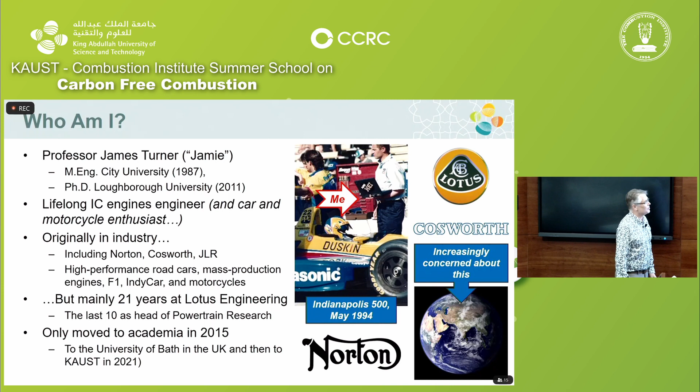Okay, so in this lecture, we're going to talk about some means of fueling energy converters. So this is a little buzzword we've come up with in the industry to avoid the word engine, right? So it does include fuel cells, converting one form of energy into another. So some means of fueling these things with zero CO2 emissions from the tailpipe. I'm not going to talk about carbon cycle, carbon capture, or tailpipe CO2 as such, but this is a way of avoiding emissions of CO2 at the point of use.

I'm going to widen the definition of fuel to include nuclear energy and hydrogen. Right, so there's a bit of discussion about whether hydrogen and ammonia really are fuels because you have to synthesize them. What does fuel mean? But we're just going to use that phrase, okay.

Nuclear energy obviously doesn't use combustion to get heat, and hydrogen is obviously considered more as an energy carrier because there are no hydrogen mines we can go and dig it out of. Everybody says it's the most abundant element in the universe, and that's very true, but it isn't in its free state for us. I mean, it's out there in the cosmos, but we haven't got any hydrogen mines. I'm going to include some talk about fuel cells as well as combustion engines.

Fuel cells, and I know there's a lecture later on, but they're electrochemical devices, so they don't combust fuel, but they do create significant amounts of heat, and that's very interesting to me. The fact that they don't combust fuel and that they create large amounts of heat is a bit of a problem for some people because they think they're really, really efficient, so they won't produce a lot of heat, but they do. But I'll discuss a bit more about that later on.

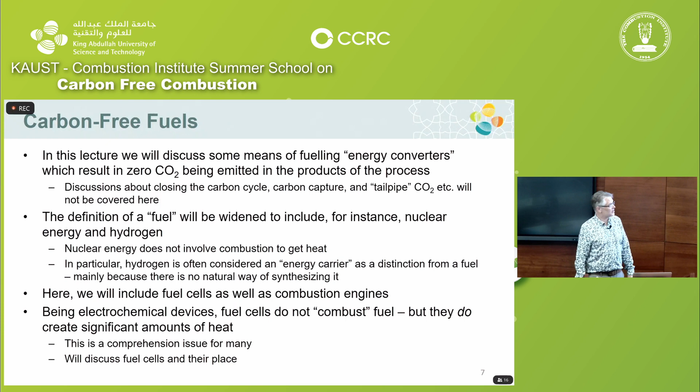So why should we even bother with fuels? You know, Elon Musk is out there saying, no, just electrify everything. You don't need fuels anymore. In fact, he's even referred to fuel cells as fool cells. So, you know, why should we bother with fuel? Well, this is a slide taken from one of the engine consultancies a few years ago, but it's indicative of what everybody says.

Basically, what we're saying is that of 100% electricity put in, you are better off putting it in a battery electric vehicle over this side here, right? You lose less energy, okay? So from an efficiency point of view, yes, you are better off putting it in a battery electric vehicle, but that sort of dodges a lot of the issues, really, because battery electric vehicles are extremely expensive, and we have no real infrastructure to support their rapid recharging, and they bring less utility because the range is less than for a conventional vehicle, if you like.

And what we've got at the bottom of this slide here is the idea of power to X, power to fuels, if you like, electrofuels as we call them. So hydrogen is a simple electrofuel. You use renewable electricity to make hydrogen, and you have green hydrogen, and I'm going to talk about the colors of hydrogen in a minute. But basically, if you convert the hydrogen into something a bit more practical using CO2, your efficiency chain is pretty awful. So a scientist would look at that and say, electrify everything, right? And that's the problem. You can't argue with that.

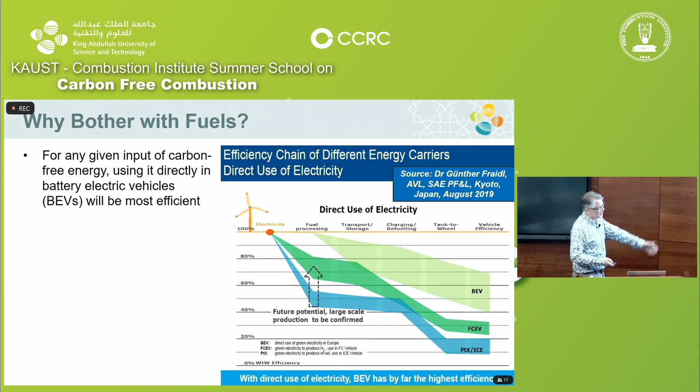Right, so put it in a battery electric vehicle, it is much better, but as I just said, there are wider implications. What about the ease and the simplicity of the change we have to undertake in less than a decade in Europe? The cost of transportation for many people is a very, very important thing in their life. There are unintended consequences as well, like human rights in the Congo, and just the general mess of the planet we're going to make, stripping it of all these elements that we need to be able to do this. Fuels can store renewable energy for a very long period of time. Batteries can't. And so this is another thing. The ability to buffer energy in the fuel system is quite an important thing. Okay.

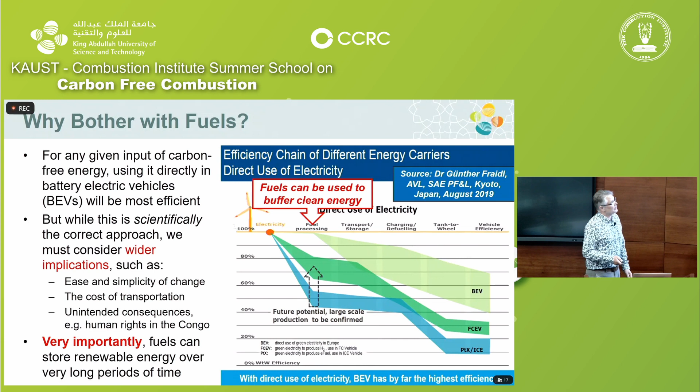Right, so what we're going to talk about. We're going to talk about fuels not containing carbon in this thing. So nuclear, I mentioned hydrogen, ammonia, and I'm going to talk about hydrazine, one slide. And some of the others that have been investigated in the past, boranes. So people have looked at using boranes as fuels. They're quite interesting. The slang phrase is zip fuels. They've actually got a higher heating value than most hydrocarbons. But essentially, I'm going to talk about the middle three up there. Some of these have some pretty awkward disadvantages versus hydrocarbons.

The internal combustion engine operating on liquid fuels has been the silver bullet for transport. You will hear this phrase, there is no silver bullet. Well, that's because we've already got one, right? You can't just replace that with only one thing. So we have a silver bullet. Nothing comes close. You know, it's set the bar for convenience and usability. And as a result of all of that, we've built over 2 billion cars to date. And you do a quick sum, that means there's a seat in one of those cars that has been made. I know they don't all exist now, but if you could get hold of them, you could put everybody alive on the planet in one of those cars, right? That is pretty amazing. That's an absolute triumph of mechanical engineering.

Have we got any mechanical engineers in the room? Ah, fantastic. You should feel proud of yourself now. I know. Automotive engineering, wow, that is the case study, really. Because they're very complex things, despite the fact that everybody thinks they're old technology and we should sweep them away in terms of engines.

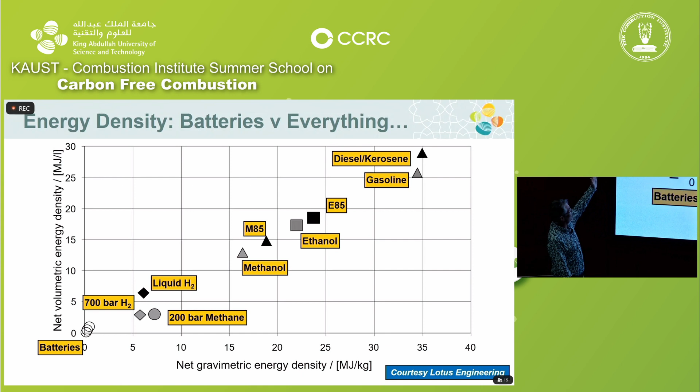so right, this is the basic problem, right? Energy density, batteries versus everything. Okay, so what we've got here is the net gravimetric energy density and the net volumetric energy density of a full fuel system. Right, so along the bottom, this is the amount of megajoules you can store per kilogram of full fuel system. And this is the amount of megajoules you can store per litre of full fuel system. And you see there's a nice sort of straight line through all of this, but there's some quite interesting things in it.

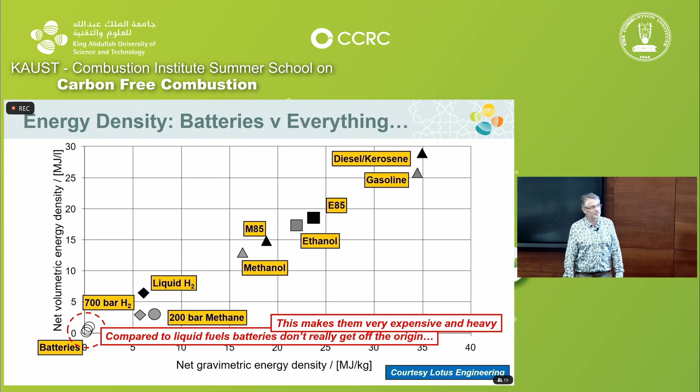First, batteries hardly get off the origin, right? This is a very good lithium-ion battery, right? You hardly get off the origin, and that is a problem because it makes them expensive and heavy. You need lots of it, right? Compared to batteries, hydrogen is usefully better. And there's a bit of a rider on that. That's at the automotive scale. There are some situations where it becomes really good, and I'll briefly mention that later on.

Surface transport could happily live in that space. The alcohols, basically. M85 means 85% methanol, 15% gasoline. E85 is the same for ethanol, and that is a practical fuel. And the reason it's practical is because they're liquids, right? Up there, aviation, you really need to be in the top right-hand corner of that chart, because for aircraft, the takeoff weight and all the rest of it is really, really important. So we will talk about aviation, but basically, to solve the problem with aviation, you have to address the fuel, right?

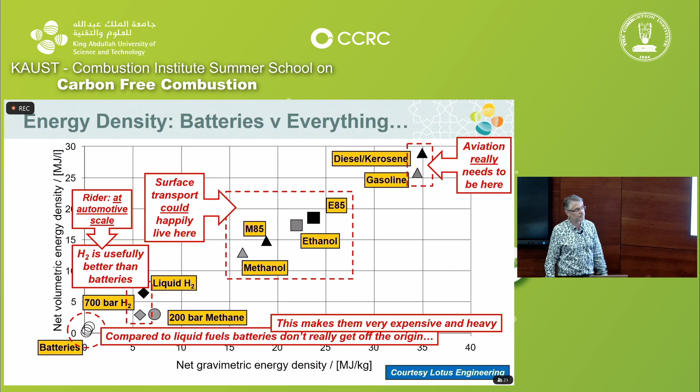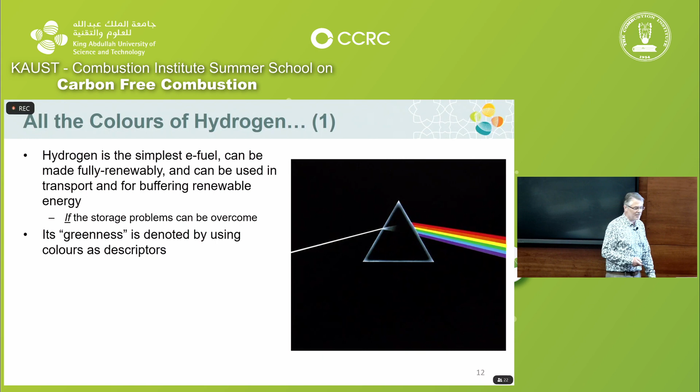Right, so hydrogen is the simplest e-fuel. It's the easiest one we can make fully renewably, and we can use it in transport and for buffering renewable energy because it's a chemical store, if we can overcome the storage problems, and we're certainly going to come back to that. The greenness is denoted by using colors as descriptors. So most hydrogen currently supplied has a significant fossil CO2 footprint. You generally obtain it by steam reforming of methane, with the CO2 just released into the atmosphere. That is termed grey hydrogen, black hydrogen. If you get it from coal, sometimes it's termed brown hydrogen. There's all different colors. But essentially, it's that end of the scale.

Blue hydrogen we obtain from natural gas, but we sequester the CO2. You can get it from oil and coal in the same way. Both have a slightly higher carbon footprint. We often consider using the CO2 for enhanced oil recovery. So you pump the CO2 back into wells to push more oil out. And that's great because on a net basis, you actually put more carbon back in the well than the oil that you take out, I believe. So that's okay. But these forms of hydrogen are not particularly pure, and that matters for fuel cells, and we'll come back later on.

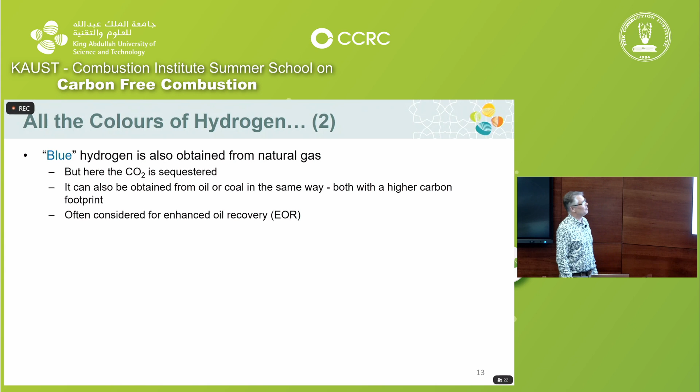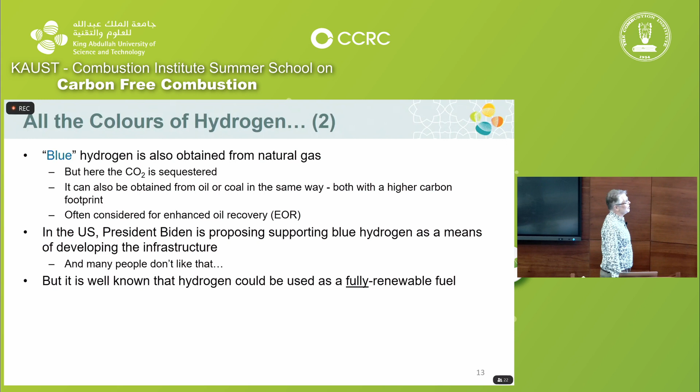In the US, Biden is promoting blue hydrogen as a means of developing the infrastructure, and lots of people don't like that on the environmental side, but nevertheless, it's a way of promoting hydrogen carrying infrastructure using a cheaper form of hydrogen than green hydrogen. But we know we can make hydrogen fully renewable, and that's green hydrogen. You use electrolysis of water to get that, and it's termed green when you use fully renewable electricity. Yeah, the amount of energy required, though, is very, very high for electrolysis. Electrolyzers are pretty efficient. They're 77 to 83% efficient, but that doesn't stop the fact that you have to have a lot of energy to break the hydrogen-oxygen bonds.

Okay, so hydrogen to mitigate CO2 release. We can also obtain it from oil and coal, leaving a solid black carbon residue. That's a carbon-free hydrogen. Whether it's really green, I don't know. But the fact is that you get a solid carbon residue then. So as long as you don't convert that into CO2, that's pretty good. And of course, you can use carbon for other things, tires and carbon fiber and things like that. There's a value to it as an element.

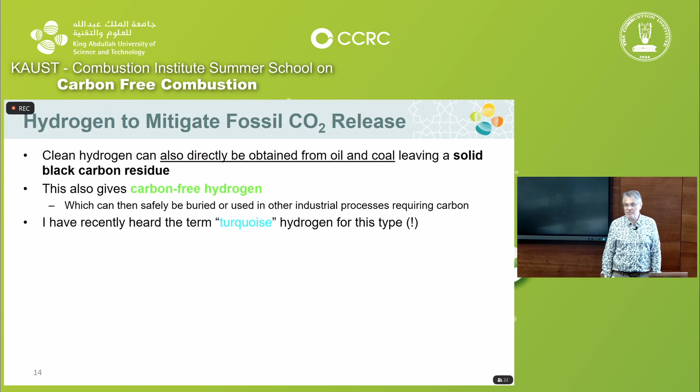I've recently heard the term turquoise for that sort of hydrogen. Who knows? There are so many different terms. But you have to make sure that you don't oxidize it. KAUST in the Kingdom and the University of Oxford have been looking at different processes to dehydrogenate oil using catalysts. So I won't go into that in any more detail, but it's quite interesting.

Right, just to say, in case anybody hasn't explained to you where our logo comes from, it's because we're trying to move from grey to green through all this spectrum here. So that's where the logo comes from when you see it again, obviously a stylized C.

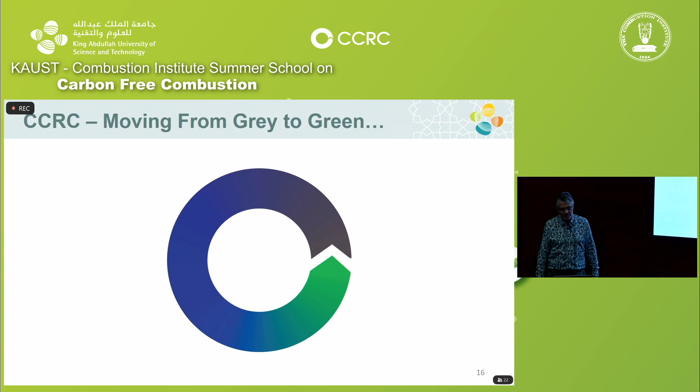Right, one of the major problems with hydrogen: storing it. You can store a useful amount of energy on a vehicle with hydrogen, and the recharging times are much lower than batteries. Actually, in terms of energy transfer, what we're aiming for is about 2 to 3 megawatts. We're aiming for higher than that for heavy duty. Just for reference, when you refuel your car with a pistol grip, you've got about 8 megawatts of energy going through your hand when you do that, right?

Think about that for a minute. If you've got an electric vehicle and you had an 8 megawatt cable, I'm not sure I'd want to hold that. But we're all used to holding the pistol grip. Just think about the power that is going through your hand. The most powerful person in the village is the one refueling their car, basically. So we can get up to a useful refueling rate with hydrogen, but it's the least dense element. And that's a considerable problem for storage.

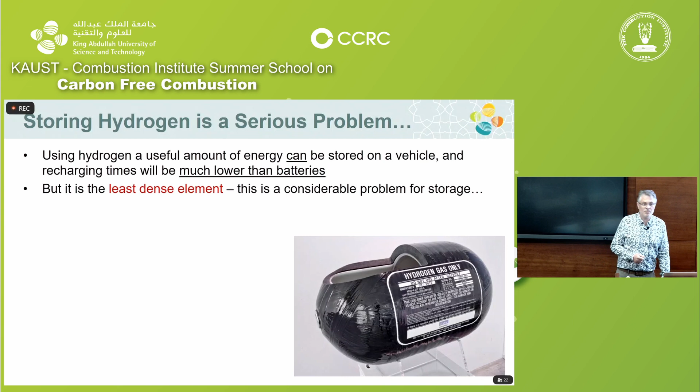There are 2 main proposals for storing it. Pressurization is the first one, either to 350 bar for heavy duty or 700 bar for light duty. So that's compressed gas storage, CHG, compressed hydrogen gas, or liquefaction. So this is an early high pressure storage tank. You can see that we've got it wrapped with carbon fiber all over the place. There's a plastic interior because hydrogen will go through metals. And as it goes through the metal, it embrittles it on the way, which is not good. So there's a plastic inner liner to keep the hydrogen in, and then you have to wrap it lots because you've got a massive pressure inside when it's full.

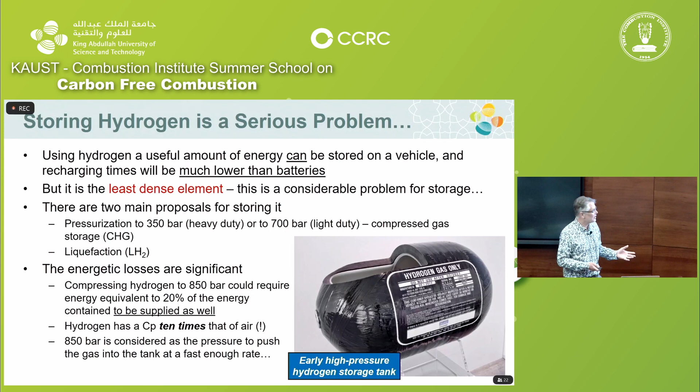Energetic losses in making it storable are significant. So when we talk about 700 bar, everybody thinks, oh, I just have to pressurize it to 700 bar. But of course, it's a gas. It only flows when there's a pressure difference. So you have to go up to a higher pressure somewhere in the system. And generally, people talk about 850 bar, just to get it to squirt into the tank and pressurize the tank to 700 bar. That could require, depending on the size of the plant, up to 20% of the energy supplied, so 20% of the lower heating value of hydrogen, which is huge because hydrogen has a very high lower heating value. Also, hydrogen has a Cp 10 times that of air, so compressing it requires a lot of power. So that's where that comes from. 850 bar is considered the upper system pressure to get a fast enough flow rate.

BMW did a lot of work in the area of liquid hydrogen storage. This was about 30 years ago. They were at the forefront of putting hydrogen into engines. They believed this was the future. Unfortunately, they seem to have picked the wrong storage choice given what we now know.

The problem with liquid hydrogen storage is that you need to keep it at 20 Kelvin, right? You're out there in the real world, maybe in Saudi Arabia, where it's very hot, and you need to keep it at 20 Kelvin. The slightest amount of heat going in through the system causes it to boil. And then you just have to vent it. Quite famously, they reckon that if you had one of the hydrogen cars and you left it in a car park for 2 to 3 weeks, if it was full when you started, you'd come back and it would be empty. It would have all boiled off. And clearly any boil-off is a disaster because you have to put so much energy into liquefying it in the first place.

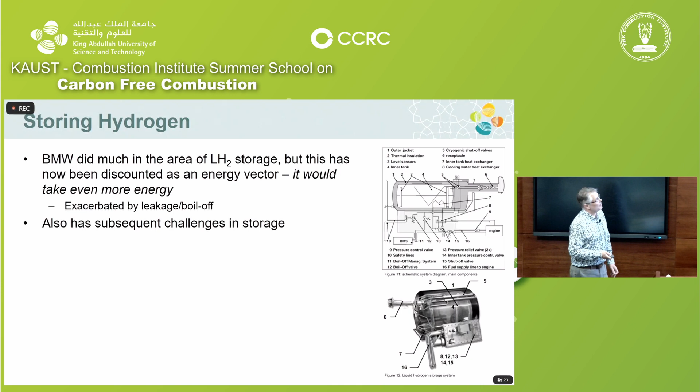You've obtained it, then you liquefy it, and then it just boils off. Right? So this is an issue. You don't get the boil off with pressurized hydrogen. So that is why really we're thinking about pressurized hydrogen for light duty. There are some serious challenges in storage because it's 20 Kelvin.

People are also looking at a mixture of cryo and compression to get the energy transfer rates up, about 67 kilowatt hours per minute, 4 megawatt rate with this. So it's quite a high rate of energy transfer. And as I say, it's the least dense of all elements, and we don't have a significant molecular hydrogen supply system. So that's a big problem.

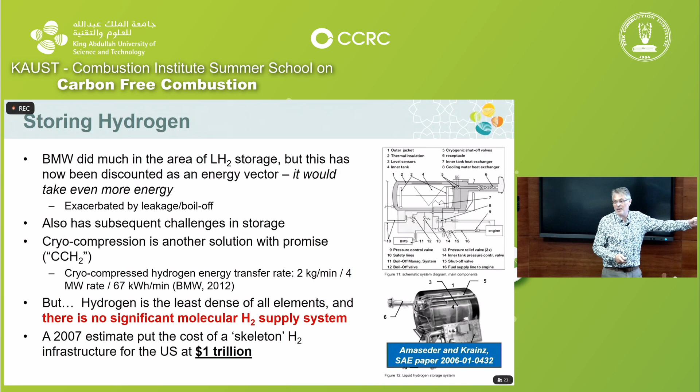In 2007, there was an estimate in the States that a skeleton hydrogen system, so one that just basically went down most of the freeways, would have cost then at least $1 trillion. Now, I know nowadays everybody chucks around figures of $1 trillion, you know, a trillion here, a trillion there. Pretty soon you're talking real money, right? But that was a big amount of money 15 years ago.

Something on what BMW did and have done, they've looked at liquid hydrogen storage, as I said, in a great deal, and they did a paper with a partner, Magna Steyr, who are a tier one, a supplier directly to the auto industry. They did actually go through all the process of developing a tank that could be productionized, right? It took them a lot of money to do that, and they had to subject it to a bunch of different tests. So this is a bonfire test.

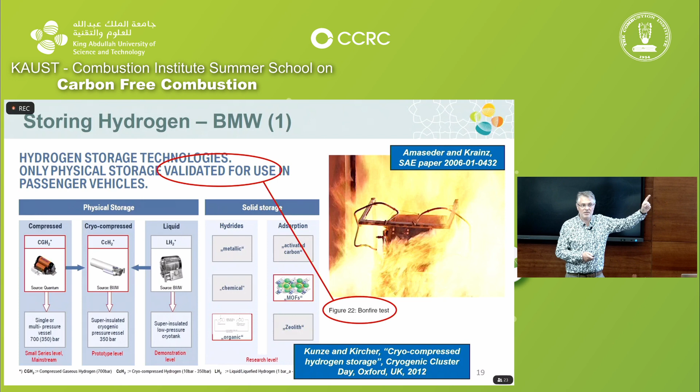So everybody gets concerned about what happens if you rupture a hydrogen tank or if there's a fire or whatever there is, and it passed this bonfire test. So inside this tank, it's full of liquid hydrogen. Managed to pass it. I don't know how long the test was, but pretty impressive seeing flames around like that around a hydrogen tank. It didn't rupture or explode.

So this idea of cryocompressed hydrogen is quite interesting. So one of the reasons for looking at liquid hydrogen is that the density of liquid hydrogen is 71 kilograms per cubic meter, right? I know that doesn't mean much to anybody, but basically that is the density of styrofoam. So in its liquid form, it's got the same density as styrofoam. So it's not very dense. But if you compress it to 300 bar in its liquid form, it'll go all the way up to 80 kilograms per cubic meter.

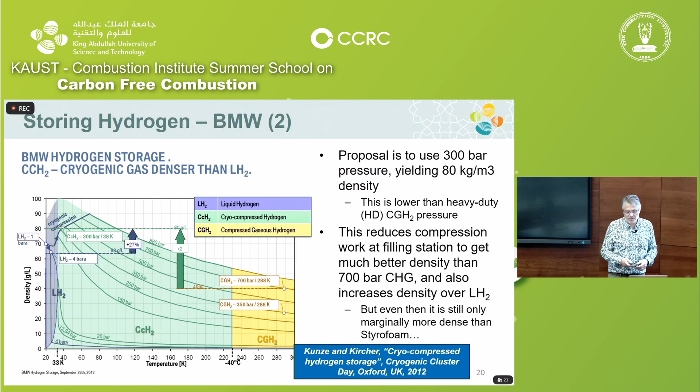That's lower than the heavy duty pressure, right? So this combination is being looked at. It reduces compression work at the filling station. So that's one of the reasons why they were looking at it. And this idea of cryocompressed is still out there as a possible means of improving the energy storage rate.

So hydrogen in engines. We need a portfolio approach to this. At the moment, the danger is the politicians have decided on the winner, and that is the battery. And everybody better get behind that, right? Because that's what the scientists say. That's the way, efficiency. And the engineers are going, hold on a minute. That may not be good. You create this monoculture in the future. What happens if there's a massive interruption in lithium supply or something like that? We need a portfolio of technologies to decarbonize the sector.

The heavy-duty sector is the one that's most likely to adopt hydrogen as an energy carrier rather than batteries. And this all varies around the world, and I apologize for a bit of a European-centric view here, but Europe is forcing the issue more than others. And a lot of that is about recharge time, because a heavy-duty vehicle only makes money when it's moving. When it's not moving, it's not making any money because you're being paid to move things. So in that sense, we'll come back to this. Aircraft are heavy-duty vehicles. Pay for something to be moved.

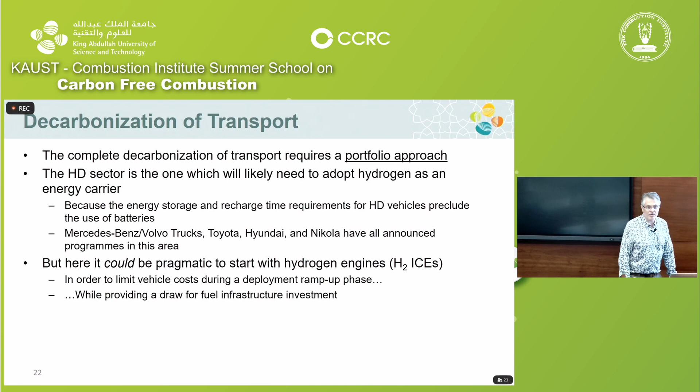So all of these truck manufacturers, some of them more established than others, have had programs looking at hydrogen storage for heavy-duty and usage. It could be very pragmatic to start with hydrogen engines, H2ICEs, in order to limit the vehicle costs during the deployment ramp-up phase. That's because fuel cells, PEM fuel cells, are really expensive. I'll come back to PEM, what that means in a minute.

And the point here is that if you put the engines out there, it'll draw the infrastructure forwards. We don't need the very, very high purity for fuel cells, but we will have a demand for hydrogen, and that will put more people making infrastructure decisions.

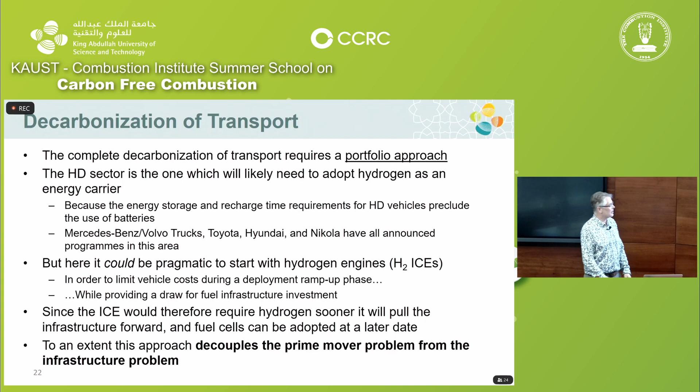Yeah, that's what I just said. So once you've got the infrastructure in place, you can then work on purifying the hydrogen that's in it. Right? And then the fuel cells can come along afterwards. So it hasn't got to be an absolute binary step that you've got to make. So you decouple the prime mover problem, as we call it, from the infrastructure problem.

So some of the characteristics of hydrogen, it's got some useful and some challenging attributes for use as a fuel. The benefits include it has very high lower heating and higher heating values, the highest of any fuels, 120 megajoules per kilogram as a lower heating value. Very wide ignition limits, right? So between 4 and 75% by volume in air. 4% in air is lambda 10.5. You can still just about burn it when you have 10.5 times more oxygen than you actually need for complete combustion.

It's a very fast flame speed as well. That allows you to dilute the charge a lot, get higher efficiency. But the challenges include it has a very low ignition energy. Heard this lovely phrase before: hydrogen is an angry gas. It just wants to ignite. Right? In any situation, if there's oxygen around, it wants to go bang. And this is the problem. That's a major safety problem, much, much worse than gasoline or any of the hydrocarbons.

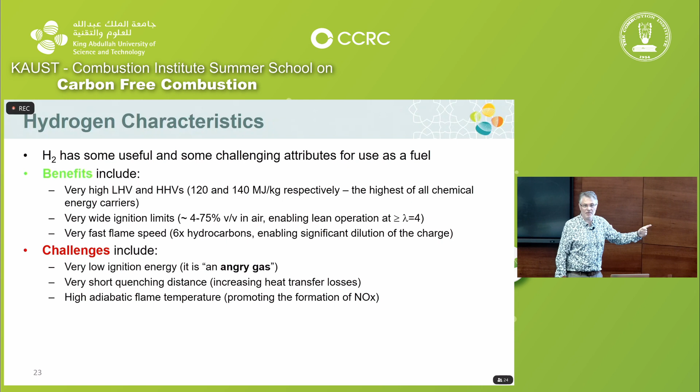Very short quenching distance. So that means that the flame goes out much, much closer to the wall, and that means you get much higher transfer to the surfaces of the wall. And Gio's going to talk about some of that after this talk. Very high adiabatic flame temperature, which promotes the formation of NOx. But fortunately, because we have very, very wide ignition limits, we can control the NOx by running it with a lot of diluent and reducing the temperature that way. So there's still limited understanding of hydrogen auto-ignition behavior. That is improving, but there's a bit of a research opportunity there.

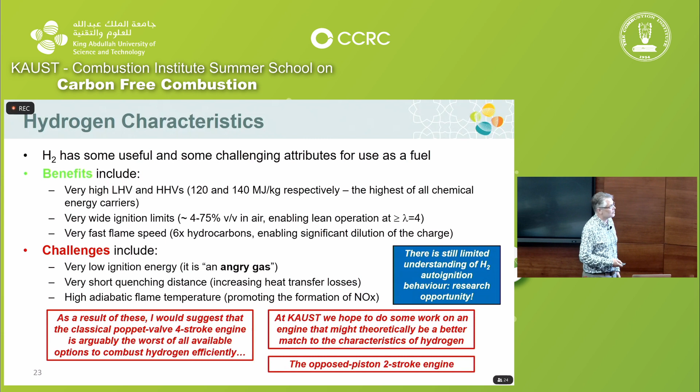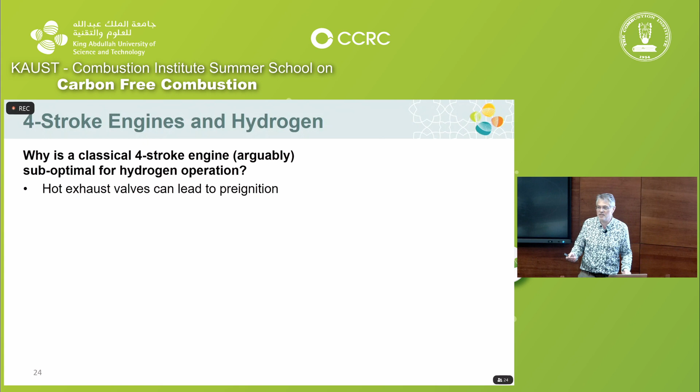Now, I won't go into it in too much detail, but there is quite a bit of evidence to suggest that the classical 4-valve per cylinder poppet valve engine, the 4-stroke engine, which we make in vast numbers, is not very optimal for using hydrogen. That's definitely what Gio's going to talk about. So we're going to do some work on some of these things, 2-stroke engine included amongst those. So why is it arguably suboptimal for hydrogen? Hot exhaust valves, they can cause pre-ignition. Yeah, you don't need much thermal energy to ignite the hydrogen.

Port fuel injection engines, so this is where we put the fuel in before the intake valve, can have problems with backfiring, which limits the injection timing and also provides a limit on how much power you can get out of the engine. Normally with engines, if the catalyst is getting too hot, we will inject some extra liquid fuel and that cools the whole combustion down. Right? So that's called catalyst over temperature protection. You cannot do that with gases because they don't have any latent heat, right? So that's one of the problems with any gas in an engine.

The low density of hydrogen displaces air, right? And significantly reduces the power output. So what we call external mixture preparation, port fuel injection if you like, has a theoretical maximum power of approximately 80% of a gasoline engine. So not the worst thing in the world, but it does reduce the attractiveness, shall we say.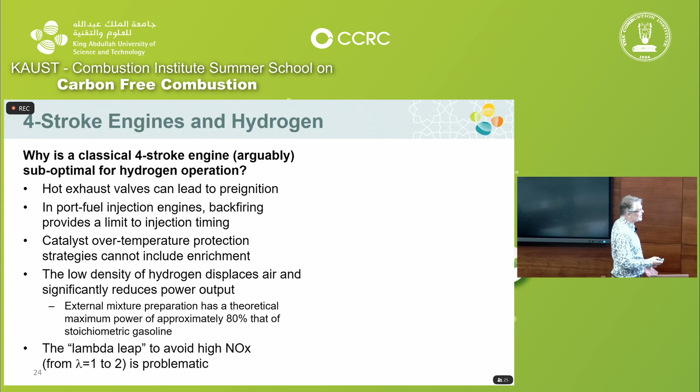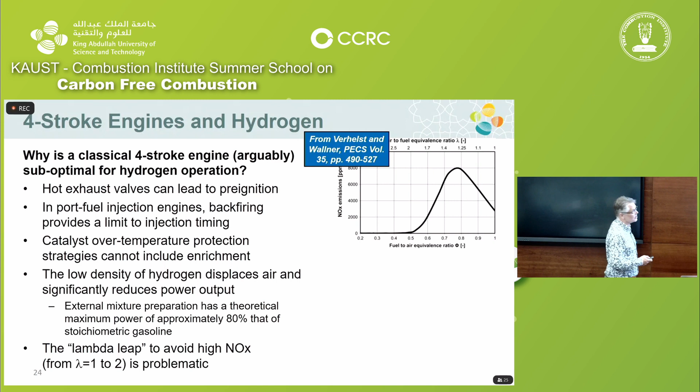Right? So what we're looking at the moment is means of leaping from 2.5 to 1, because when you leap to 1, you can use a simple catalyst. Okay? Anywhere between 1 and 2.5, you can't deal with the NOx that comes out of the engine. At 2.5, there's not really any NOx. So we need to think about strategies to be able to do this. BMW did some early work with this, with their hydrogen engines. So there's some quite interesting strategies that we're going to investigate.

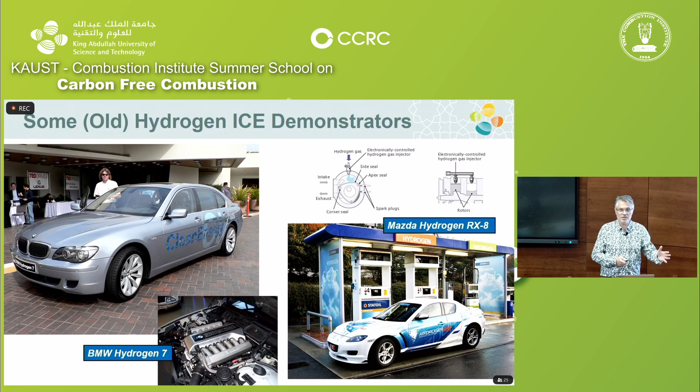So there are some old hydrogen internal combustion engine demonstrators. This is the BMW Hydrogen 7. I think they made about 50 of them. It's a bi-fuel engine, actually. It would run on gasoline or hydrogen. And then Mazda in Japan built a series of rotary engine demonstrators that ran on hydrogen. Gio's going to talk about the rotary engine on hydrogen, but theoretically that is a very good match.

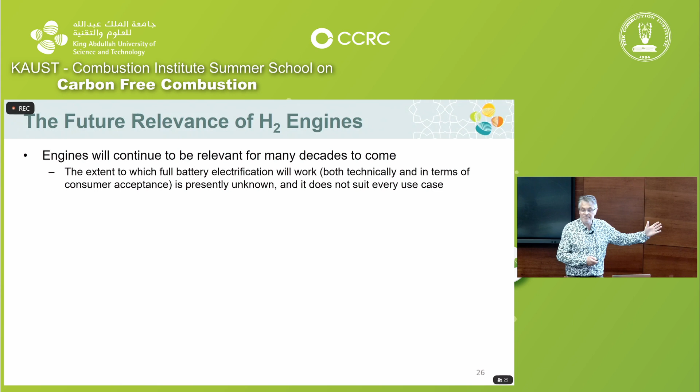Okay, so the future relevance of hydrogen in engines: they're going to continue to be relevant for many decades to come, basically. That's my view, and I think it's the view of a lot of the industry. And that's because the extent to which full electrification is going to work is by no means proven, right? It doesn't suit every use case either.

So technology development is going to slow down as the car manufacturers, the OEMs, sorry, buzz phrase, the OEMs move to electrification. They're potentially the reason why a lot of engine research is done. So technology development will slow down, but there are still many technological routes open to us with engines. It's by no means a fully understood area.

Hydrogen ICEs are going to be necessary for zero CO2 tailpipe emission heavy-duty applications, and they're being developed now. And because it's a well-understood technology, the ICE, you could imagine it being relevant for light-duty applications in some parts. Depends on the infrastructure, obviously. And particularly, this might be important if the battery electric vehicle thing starts to falter, because they're always going to be expensive. But we are dependent on the supply infrastructure.

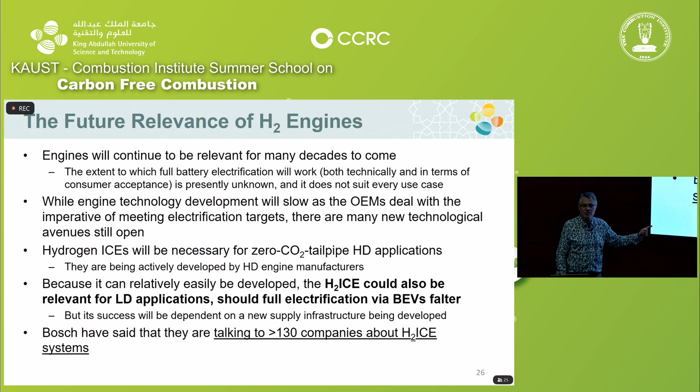Robert Bosch, the supplier of fuel injection equipment worldwide, have said in one of the conferences that we had here, they had been talking to over 130 companies about hydrogen internal combustion engines. I guess most people would think there aren't 130 internal combustion engine companies in the world, but there are more than that. But that is a vast proportion of it. And that, to me, suggests that while the companies all talk about battery electric vehicles, a lot of them are still investigating engines with hydrogen in because they need a backup plan in case the electrification thing doesn't work.

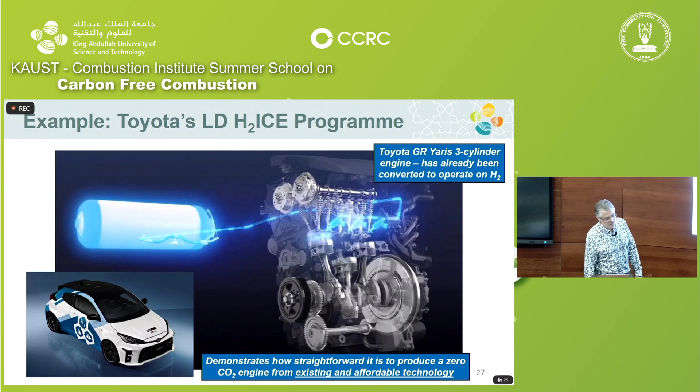So Toyota have got a program, it's quite public. They've hydrogenized, I won't say hydrogenated, we'll say hydrogenized, one of their engines, the Toyota Yaris 3-cylinder, converted to run on hydrogen. But it actually really demonstrates how straightforward it is to produce something which is effectively zero tailpipe CO2 from existing and affordable technology. And this is very recent. This is within the last week, I think.

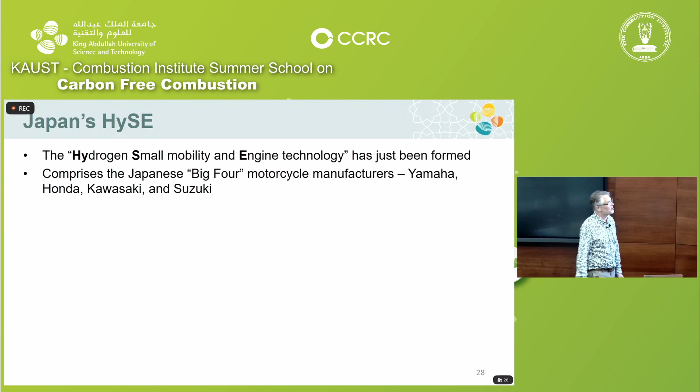So Japan has just formed a publicly funded consortium, the Hydrogen Small Mobility and Engine Technology Consortium. It comprises the Japanese big four motorcycle manufacturers, Yamaha, Honda, Kawasaki, and Suzuki. Quite how they got them all to work together, I don't know, because obviously they are vast conglomerates in their own right, and ordinarily they'd be competitors. They're going to develop hydrogen-powered engines for motorcycles, small marine vessels, construction equipment, and small vehicles in Japan.

And the chairman of HySE is the executive officer of Yamaha's R&D Center, and he said, "We are committed to this endeavor with a sense of mission to preserve the use of internal combustion engines, which epitomize the long-term efforts that our predecessors have invested." So I'm right behind this guy. He's going into this because he wants to keep the engine alive. So get behind that. We look forward to what they manage to throw out in the future.

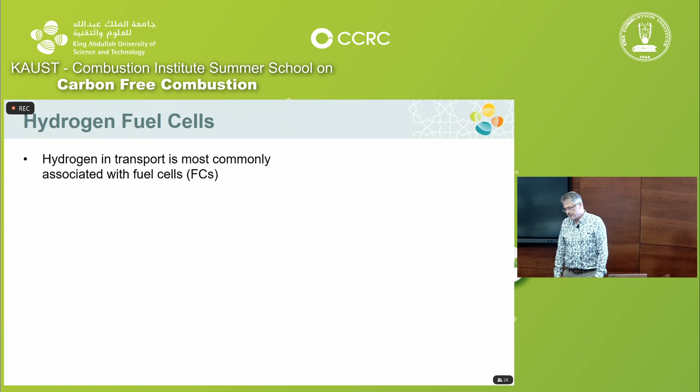Right, hydrogen fuel cells. Hydrogen in transport at the moment is most commonly associated with fuel cells, FCs. They are not a new technology, right? William Grove invented the first one in 1839. GM built the first fuel cell vehicle in 1966. They called this thing the Electrovan. And what you can see here is it was a sort of minivan thing in the States. There's one passenger seat in the back. But you know what? They built it and they ran it nearly 50 years ago.

Fair enough. GM, a fantastic company when it comes to research and development. The products they make, we can move to one side. But in terms of the impact that they've had in the world, particularly in terms of internal combustion engine understanding and development, it is pretty big. Yeah, they used to have lots and lots of money. At this point in their history, people were saying that General Motors had more money than God. So this was a bit of a toy, I guess, but nevertheless, they built and ran the first hydrogen fuel cell powered vehicle then.

Now, I will say this. Right, the fuel cell and the battery significantly predate the internal combustion engine. Everybody wants to work on the latest technology, right? If you want to work on the latest technology, you work on internal combustion engines. Otherwise, you are going into the past, okay? It's as simple as that. The history books tell us this, right? Internal combustion engines are the most modern conversion technology that we have.

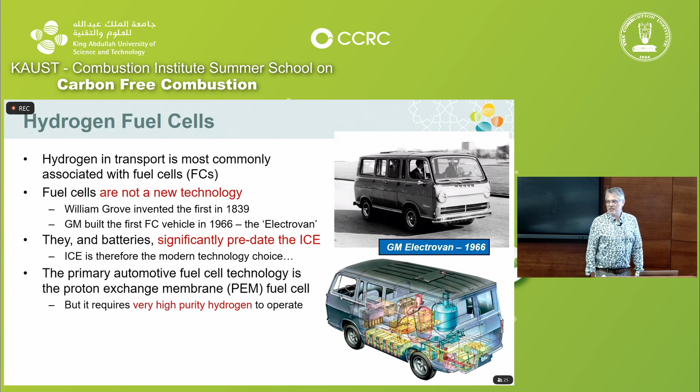So the primary fuel cell technology for automotive use is the proton exchange membrane, or the PEM fuel cell. It's very expensive because it has a lot of catalyst in there. And as a result of all of this, it requires very, very high purity hydrogen. If you put the slightest amount of CO into the hydrogen, it will kill the fuel cell. And the catalyst loading is massive, right? This is a major problem.

We are doing a project at the moment investigating poisoning of fuel cells. But basically, what this means is ordinary blue hydrogen or grey or whatever it is, isn't clean enough by a long way. Put it in an engine, no problem, that won't even notice. But for a fuel cell, way, way off, right? So green hydrogen is really the way that we have to go with fuel cells, because obviously when you electrolyze water, you don't get any carbon out with it. So that's a match. But we require very high purity hydrogen for PEM fuel cells.

PEM fuel cells are also a form of low temperature fuel cell. So they operate at about 80 degrees centigrade. This means that they have to reject the 30 to 40% of heat that they produce at 80 degrees, right? So everybody thinks they are really efficient, and they think that that means that they won't need very big radiators. When you look inside a fuel cell vehicle, the radiators are huge because they only have a small temperature difference to reject the heat over. And that's always a problem for people when they see them first time. Why are the radiators so big? It's because of the problem of heat rejection.

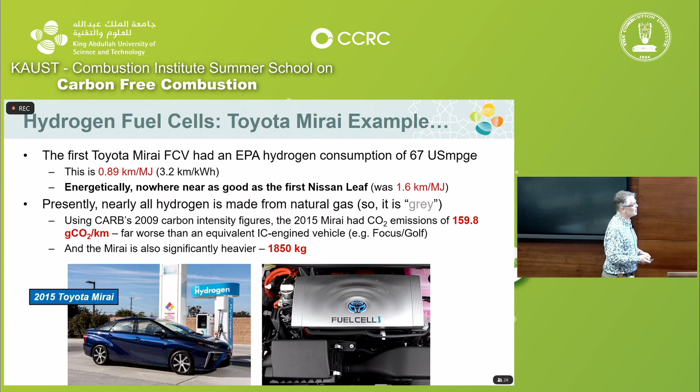So we've got other fuel cell vehicles now. Mirai, latest one, has improved the efficiency. It's now up to about 0.81 kilometers per megajoule. That's worse, isn't it? Oh, well, I'll have to go back through that. The latest EVs are approaching 1.8 kilometers per megajoule. But they're never going to be as efficient as electric vehicles. But that's not the point. It brings you some convenience, right? The rate at which you can refuel them is the important thing.

And of course, with trucks, batteries that carry a lot of energy are very, very heavy and very, very bulky. And trucks have maximum weight limits, or you want the maximum volume size for payload. This is another impact. So this is where fuel cells start to make sense in trucks. Yeah, rapid refueling is a major, major thing.

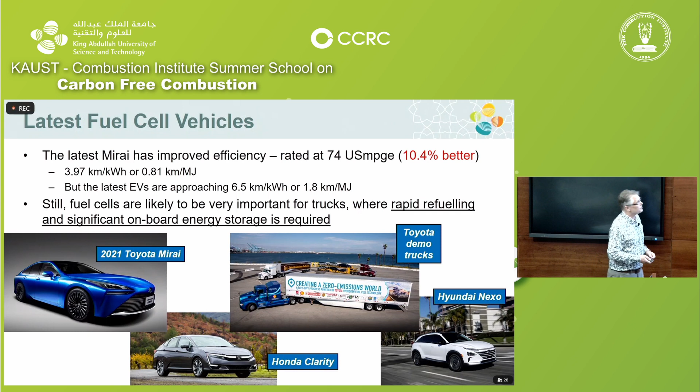So you can make a choice for a truck. Do you put the PEM fuel cell in or an engine? PEM fuel cells are efficient, 63.7% peak efficiency in the first generation Mirai. This is the stack level efficiency. Stack level efficiency is 66%, and the fuel cell system efficiency is 63.7, right?

That's really, really good. But I'll just invite you to look at the fact that really that's about 5 or 10% of full load, right? That's where the maximum efficiency is. If you want to run the thing in a heavy-duty vehicle, you generally run up towards full load, right? And as you run a full fuel cell, its efficiency drops off. Round about full power, Mirai is only 40% efficient, right? That's not particularly good compared to a combustion engine.

So a hydrogen combustion engine should be expected to beat that. There's not anybody that works in the industry that doesn't expect us to beat that with a hydrogen combustion engine. So you could operate the fuel cell at a lower load to get the efficiency up, but then you've got to have a much, much bigger fuel cell. And they're really expensive, right? So you're now into a balancing act of the sizing of the fuel cell.

And of course, engines put out shaft work, so the transmission is more efficient in an engine-based power production system. So we should be able to exceed this in a vehicle. That's why there's all this work going on hydrogen combustion engines.

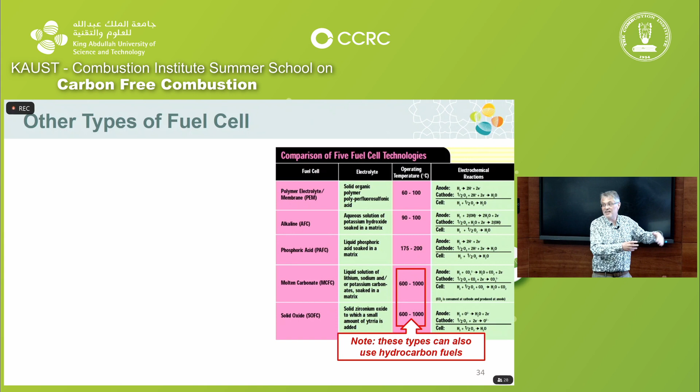So the beauty of it is the majority of the energy conversion is not subject to Carnot efficiency, which is the problem with combustion engines. The majority is electrochemical, right? And then you put the waste heat recovery on, that is subject to Carnot efficiency, but basically anything you can get out of that is a win. It improves your efficiency. I love that. We're back in the ring as mechanical engineers, as I say.

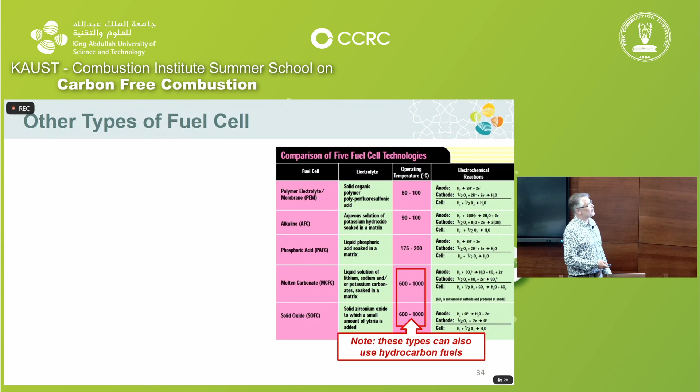Yeah, Mirai stack efficiency, 66%, that's what they quoted, so 29, 30% of the energy is heat. Compounding with a turbine, up to 80%. I'll have that. And of course, if you've got a turbine, you can take some of the power out mechanically, so you can have a slightly more efficient transmission system. Obviously, with a fuel cell, most of it comes out electrically. You don't get any shaft work, but with a turbine on there, you do have a shaft, and you could gear that to the wheels. So we're studying this at KAUST at the moment.

One of the really interesting things is that solid oxide fuel cells can actually use hydrocarbon fuels. Very high temperature, they reform internally, they don't get poisoned by carbon. Really interesting ideas with this because no nitrogen can cross the membrane, which means that in the anode compartment, you've got partially converted fuel, water and CO2. If you can get the conversion up high enough, you only have water and CO2 coming out the anode, which means you condense the water out and have pure CO2 for easy sequestration.

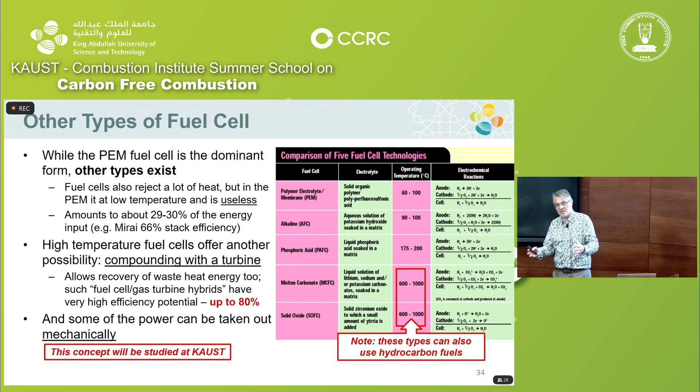So these things could be really interesting to enable us to continue to use fossil hydrocarbons, but sequestering the CO2 really quite straightforwardly. So we're going to look at some of that. And it's applicable to marine and aviation, and basically the reason for this is they have to be big, right? Yeah, and they can also use ammonia.

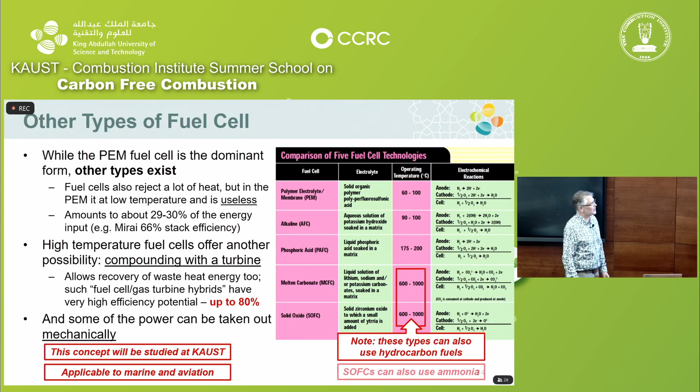So this is something that we're going to be looking at here. When I say compounding, you've got the fuel cell down here, and then the gas turbine takes the waste heat. You combust the off gas, as we call it in this instance, and you expand it through the turbine. That drives the compressor because they need to run at pressure, and the electric machine takes out the excess power. So it's really quite an interesting system.

Right, a question. How do you decarbonize aviation? I guess some of you will have got here by quite a long-distance aircraft, right? So this is a question if we want to carry on traveling by air. At takeoff, a 787-9 has over 50 tons of fuel on board for a 9,000 kilometer flight. That is about 605,000 kilowatt hours of energy. I haven't converted that, it's more than that in

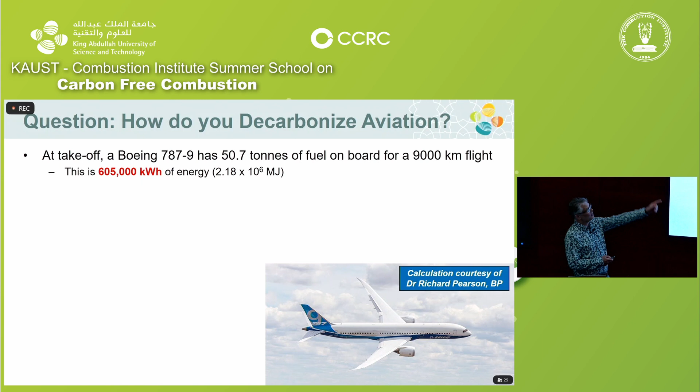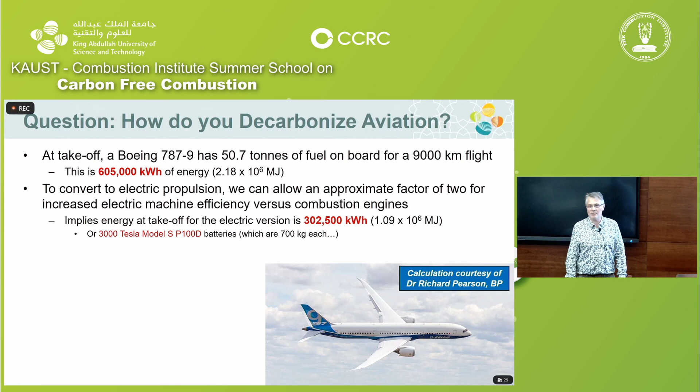megajoules. If we're going to convert this thing to electric propulsion, we can give ourselves a factor of 2 for efficiency. So that implies the electric version would have to have 302,500 kilowatt hours of energy on board, or 3,000 Tesla Model S P100D batteries, and they weigh 700 kilograms each, right? If you use 150 to 250 watt-hours per kilogram as a cell level energy density, the cells would weigh anywhere between 1,200 to 2,000 tons.

Currently, the takeoff mass, including the 50 tons of fuel of a 787, is 253 tons, right? Okay. The cells in the battery alone would be between 5 and 8 times heavier than the all-up weight of the aircraft at the moment. So that's not really the problem, though, right? It's a big enough problem. The real problem is the amount of time it takes to charge.

We all get fed up when we're waiting for a flight to take off, right? We turn them around in 2 hours. We refuel them in that time, as well as replenishing the snacks and all the rest of it. But basically, you can't wait a week to recharge the aircraft. You could put higher charge rates and all the rest of it, but you are not going to recharge a battery of that size in 2 hours.

Okay? And as I said, heavy-duty vehicles don't earn any money when they're stationary. What they're paid to do is transport things or people. So this isn't going to work for long-distance travel. It might work for short-distance travel. People are looking at fuel cells as well for that, as well as battery packs. Long-distance travel, it's a fantasy, okay?

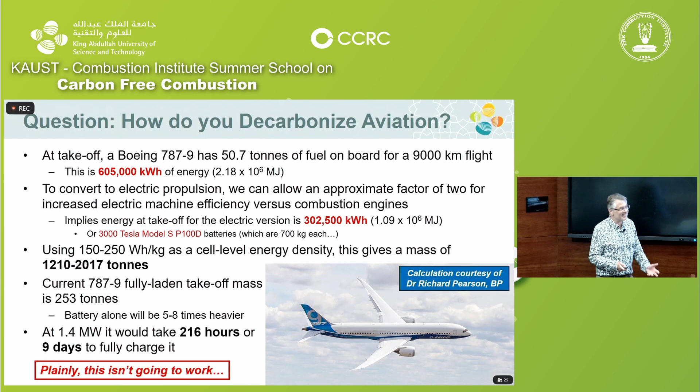So decarbonizing aviation has actually been researched before. Ammonia has been looked at. I'll come back to that. Hydrogen's been used in large rockets. Now you've got a problem. Surely the mass of the rocket matters a lot. Well, yes, it does. But they carry so much energy that when you use liquid hydrogen, the insulation of a liquid hydrogen tank has always got to be the same thickness, regardless of the size of the tank. It doesn't change because it just needs to keep the heat out.

It's not like a pressure vessel where the pressure goes up and you have to make it bigger. With liquid storage, the size of the insulation stays the same. So when you have to carry a vast amount, the mass of the tank goes down as a proportion of the all-up weight. Does that make sense? So that's why this orange thing is the liquid hydrogen tank and oxygen. Basically, that's the tank that carries the liquid hydrogen. It also has the highest specific impulse, hydrogen and oxygen, so they're the most powerful rocket engines that we have.

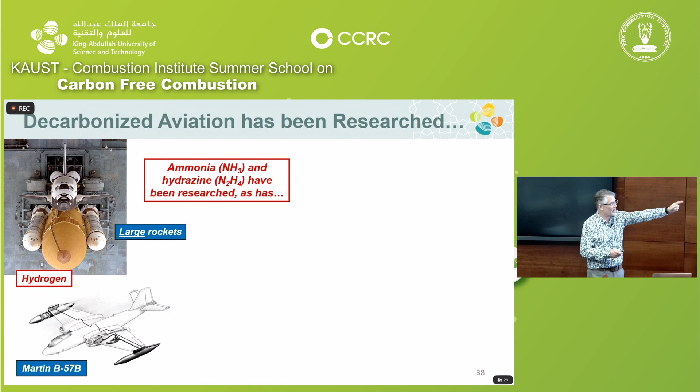People have done it. We've flown aircraft briefly on liquid hydrogen. This one ran on kerosene as well, a test that NASA ran, running one of the engines on liquid hydrogen with the tanks in the wings. People have also looked at powering aircraft directly using nuclear power. So this is the answer to the question during the Cold War: how do we keep the nuclear bombers in the air all the time, just circling round carrying their nuclear bombs?

So there was a big study in the States where they built a turbojet. There's 2 turbojets with a nuclear core between them. The compressor from one fed through the nuclear reactor, and then the nuclear heat was expanded through the turbine. And then, to get off the ground, since it's quite heavy, they had an afterburner that was fueled using normal fuel. But once you're cruising around, you're just on the nuclear heat.

And apparently the US operated one of these nuclear reactors over its own eastern seaboard in the 1950s and 60s. Great to be an engineer then. Nobody cared. We're just going to do all this wacky stuff.

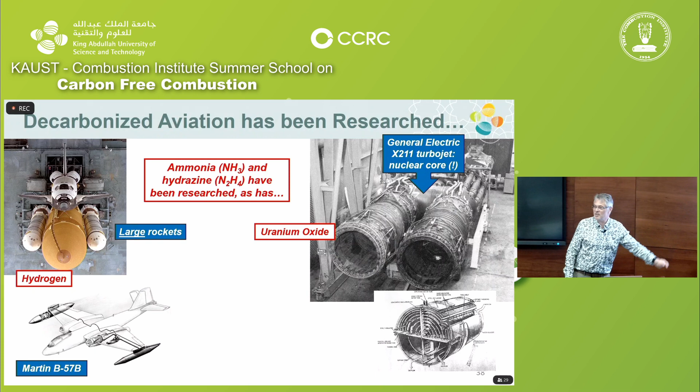Apparently all the crew, when they were flying these things, they had to sign a disclaimer saying, "I do not intend to have any children." Right? Because the radiation from the nuclear reactor was so big. But anyway, we've looked at that, right? We could power aircraft using nuclear heat if we wanted to. And we're actually starting to look at this again.

We've looked at using nuclear thermal propulsion engines for interplanetary travel. The later parts of the Apollo program were originally scheduled to have these nuclear propulsion engines. So yeah, get your mind around that. Rocket taking off with a nuclear engine in the upper stages. Yeah, they did actually crash one just to make sure it didn't explode. So they did some interesting stuff. Again, well, it must be great to be an engineer.

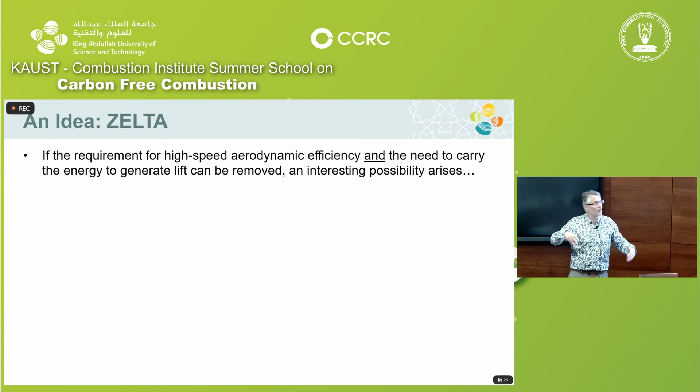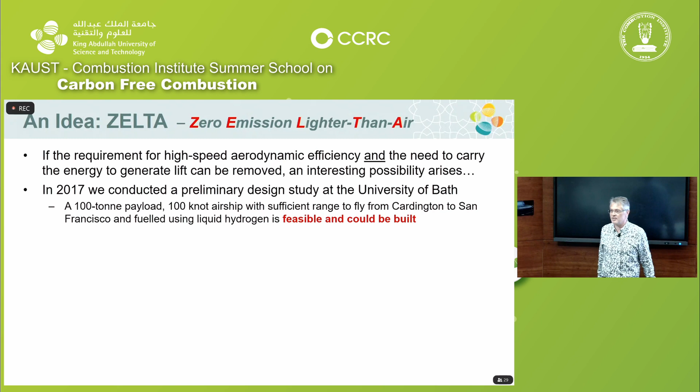Right, just as an aside, this is something we did at the University of Bath. The problem with aircraft is they generate their lift from the fuel, and that means that you've got to carry extra fuel just to lift the aircraft. So we looked at this thing, zero emission, lighter than air. So here, with an airship, you're generating your lift statically. So you don't need as much fuel. And of course, they're nowhere near as fast, and the aerodynamics don't get mucked up by the tank.

So we did quite a big study on this, and this is really good. Alice Richardson, she did a fantastic job looking at this. So yeah, come on, let's go and get a few $1 trillion and go and build an airship, because that's really interesting. But you could look at it a different way. And this is just sort of indicative. We have to think of things. All things should be on the table when we're talking about decarbonization.

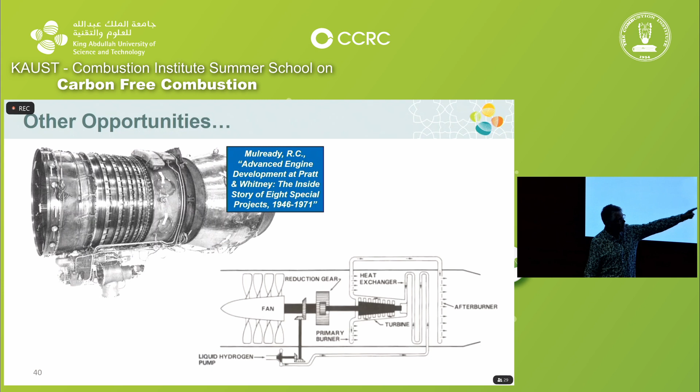Right, other things you can do with liquid hydrogen. So this was done by the Americans. Pressurize your liquid hydrogen to about 70 bar, feed it through a heat exchanger, expand the hydrogen through a turbine itself, and then put it out the back and just burn it as a massive afterburner. So this is called an expander cycle. And it was operated again in the 50s and 60s, and it was pretty efficient, apparently.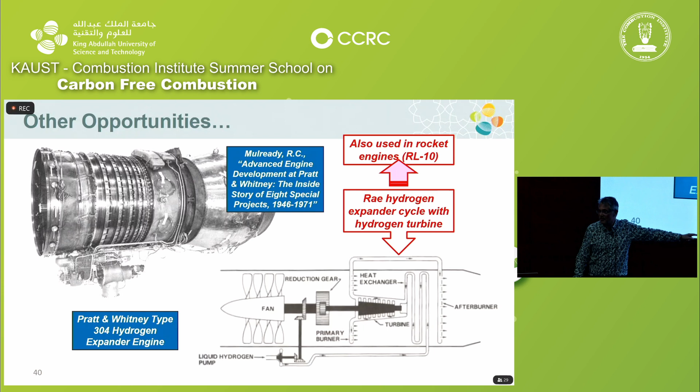Just imagine that. This is a variable volume pump operating at 20 Kelvin, pressurizing hydrogen to 70 bar, right? We think we're so clever nowadays. A piece of mechanical engineering, it must have been amazing. And it did operate quite happily.

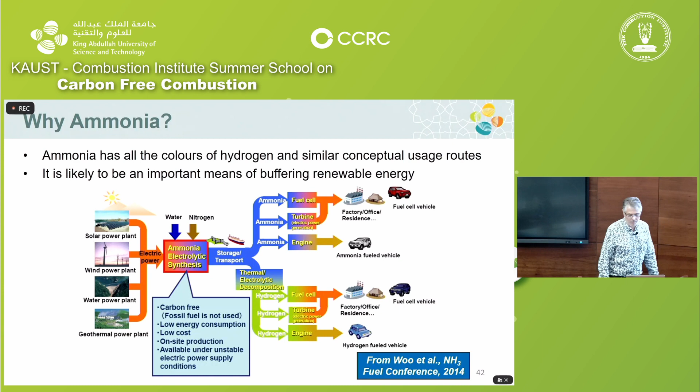Right, ammonia. I need to speed up. All the colors of hydrogen and similar conceptual usage routes, likely to be an important means of buffering renewable energy. It would be an ideal solution because it contains zero carbon, it's easily liquefied, and you synthesize it via a Haber-Bosch process. Being considered as a hydrogen carrier because it can be readily cracked back into hydrogen and nitrogen. Reverse of the synthesis reaction.

Unfortunately, though, it does have some significant disadvantages. Number one, it's a toxic gas, right? So I am a methanol fan, and people have smacked me around the head for years saying it's a toxic liquid. I fought back. It's about as toxic as gasoline, right? Don't drink it, yeah? But you can't give poisonous gas a free pass. That is different. Much, much higher level of danger. But fortunately, we can tell when it's around because it smells to high heaven in minute concentrations.

Very poor combustion characteristics. In fact, in some senses, it's not actually classed as being combustible, I think. But anyway, it's very poor because the laminar burning velocity is so low, and its combustion creates significant NOx emissions because there's lots of nitrogen in the fuel. You can use it in solid oxide fuel cells to get around some of the direct combustion issues. And that's being investigated for aviation.

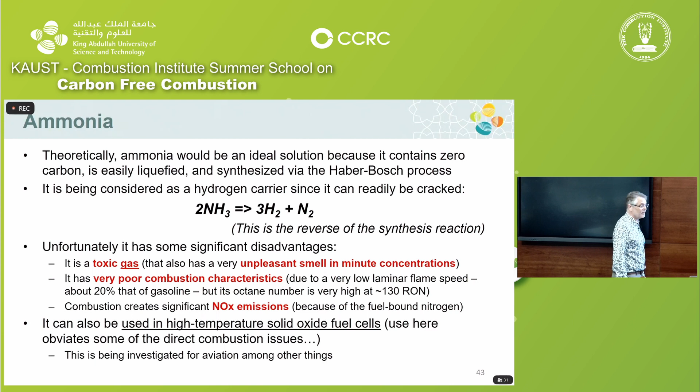So we've got various different things. I'm sure you've seen all this before. Used in Belgium in 1943 to power buses. NASA built a rocket plane using it as one element of the rocket propulsion system. Various automotive demonstrators have been built. And the US military investigated the mass usage of ammonia as a way of shortening its supply lines. I'm going to come back to that.

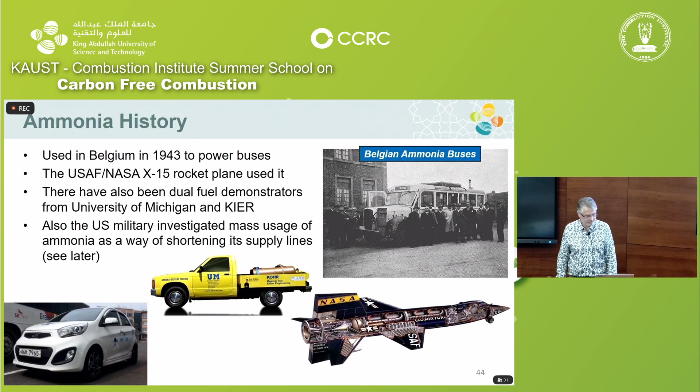Okay, so we're doing significant research on combustion here. So this is some of our own photos. And we're converting a gas turbine to operate on it, which is not an easy feat because its combustion characteristics are completely different to natural gas, which is what it ordinarily runs on. There are plans to use it in shipping, but I would suggest that that's likely not to be passenger ships.

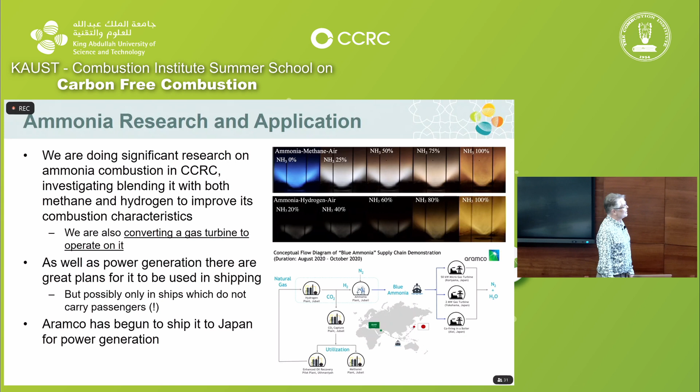Aramco has begun to ship it to Japan for power generation. Right, previous investigation of ammonia. So we've just talked about nuclear-powered aircraft, right? That is the sensible end of things.

So the US military investigated using ammonia as a fuel because of the problem of the length of supply lines for fuels into battlefields. Fuel's really expensive by the time it gets to a battlefield. You've had to spend so much money getting it there. They wanted to see whether they could synthesize a fuel in theater, right? So they looked at ammonia.

So first off, they had these compact battlefield nuclear reactors. So they tow these things onto the battlefield, right? Near a water source. And then this would be used to power an ammonia synthesis skid, right? So Haber-Bosch process, make ammonia on the battlefield.

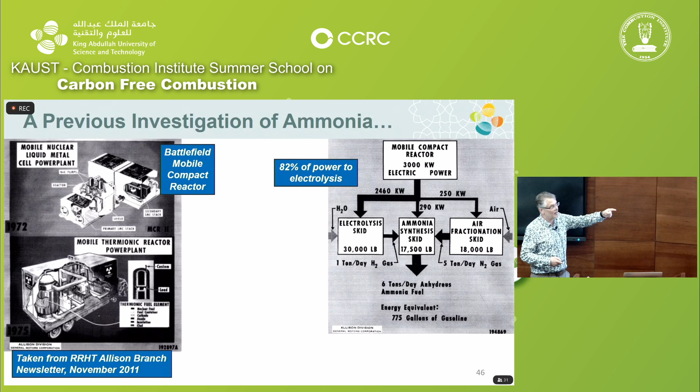Right? And 82% of the power goes into electrolysis on this, if you remember what I was talking about, the huge amount of power it takes to electrolyze water. This is another element. It's going to take a lot of power to synthesize ammonia like this. About 33% efficient in terms of the higher heating value, the energy in versus the energy you get out of the ammonia. And then they were going to have various engines, including tanks and helicopters and stuff, that would run on ammonia. Right? But this was all a big, big thing.

So you've got a battlefield, you've got a nuclear reactor, you're going to synthesize a poisonous gas, you're going to use it in engines where you know that it's horrendously corrosive, yeah? All because you want to shorten your supply lines. But what you can do is ask yourself the question, what can possibly go wrong with this? Right? But this has been looked at before. Fully carbon-free e-fuel for a very specific application.

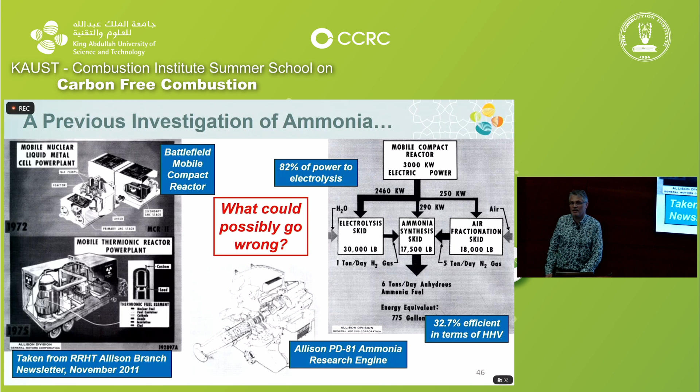So one slide on hydrazine. Anybody know what hydrazine is? Go on then, what is it? Yeah, if you imagine, it is to ammonia what ethane is to methane, right? So it's another nitrogen atom with hydrogen off the back of it. So it's N2H4, right?

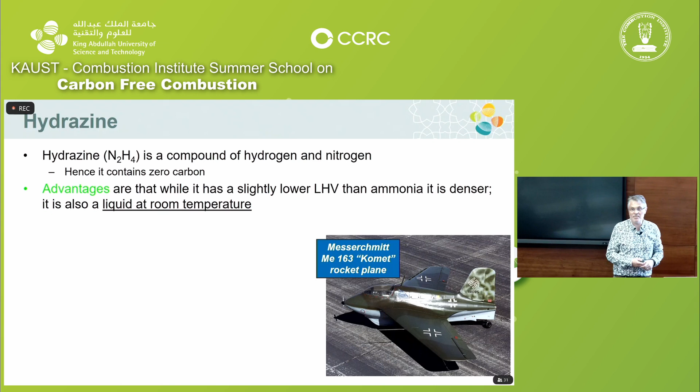Another compound of hydrogen and nitrogen, hence it contains zero carbon. And it has been used in transport, albeit a very specific application. This aircraft from 70 years ago, a rocket-powered interceptor. It has slightly lower heating value. It is much denser than ammonia, so the stored energy is much, much better. And it's also liquid at room temperature. It's looking good. Could this be the energy carrier of the future?

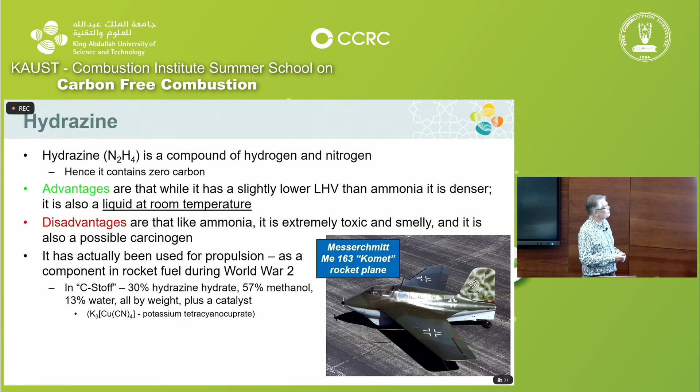However, it's extremely toxic. It's cancer-forming, carcinogen, and it's very, very smelly as well. So it's not very nice stuff. It's even worse than ammonia in many senses. It has actually been used for propulsion as a component in rocket fuel. There you go. So it's not pure hydrazine, but it was being used as a component in rocket fuel.

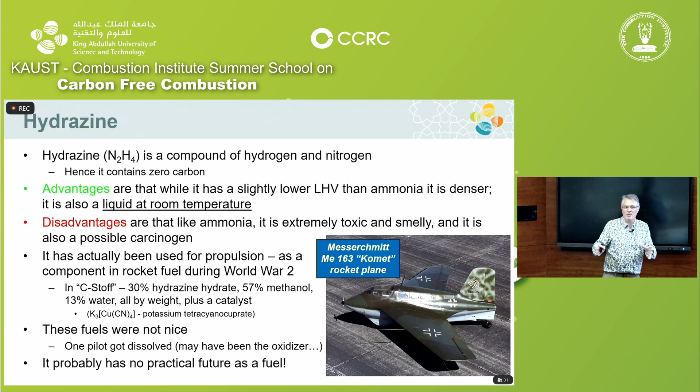And just to illustrate the dangers of hydrazine, it's not a nice fuel. One pilot got dissolved. Tanks ruptured inside the plane. So I don't think we're going to use hydrazine as a transportation fuel in the future, but it's a possibility. If you look at this, no carbon, that's the only sensible thing. But I don't think it's got any practical future as a fuel.

So some concluding remarks. Decarbonizing the energy carrier is always going to take more effort than simply digging crude oil out of the ground, lightly polishing it and shoving it into the system, right? We have to get our minds around that. It's always going to take more energy. Now, the question is, is it sensible?

We have to eventually stop using crude oil. We have to get our minds around that as well, right? So we're going to have higher costs in the future. Some energy carriers obviously permit zero emissions at point of use. The best, energetically, is electricity, but it's expensive at a vehicle level, offers significantly reduced range and results in considerable inconvenience in charging time. Just some of the challenges of trying to electrify everything.

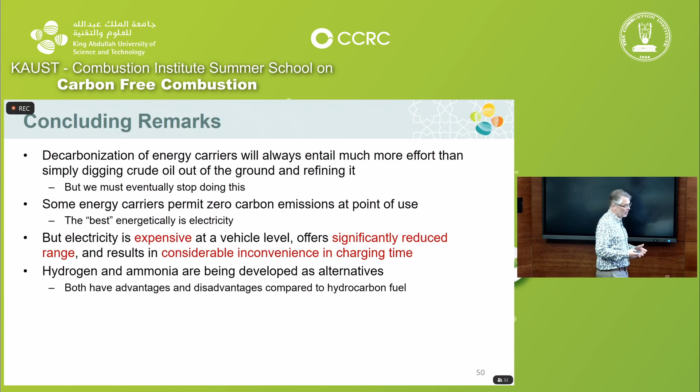So hydrogen and ammonia are both being developed as zero carbon alternatives. They have advantages and disadvantages compared to hydrocarbon fuels.

We have got some strategies being developed to improve the likelihood of their use, and the Kingdom is looking at some of those in terms of exporting blue ammonia to Japan, etc. And we're also talking about here on KAUST, we want to hydrogenize our transportation system within the university, so that'll be good. Not particularly nice at the moment with diesels.

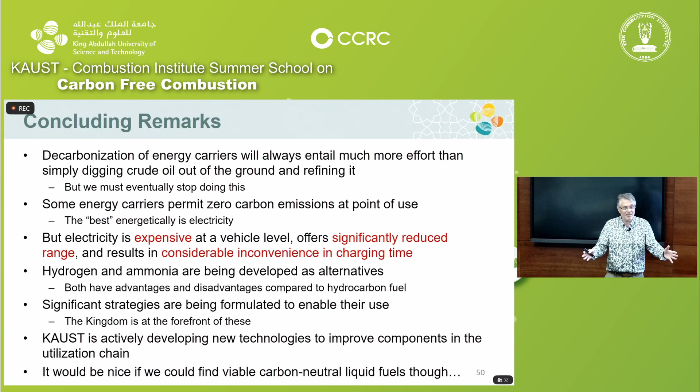So we're obviously developing new technologies to improve components in the utilization chain, including engines, which is what Gio's going to talk about next. But it would be really nice if we could come up with a viable carbon neutral liquid fuel. That's what I'm going to leave you with, right? You can't do it straight in the molecule, but if you get your mind around net zero fossil carbon, come up with something and synthesize it and use it more easily in vehicles, that'd be lovely, right? Spoiler alert, it's methanol. Right, I'll leave it there.